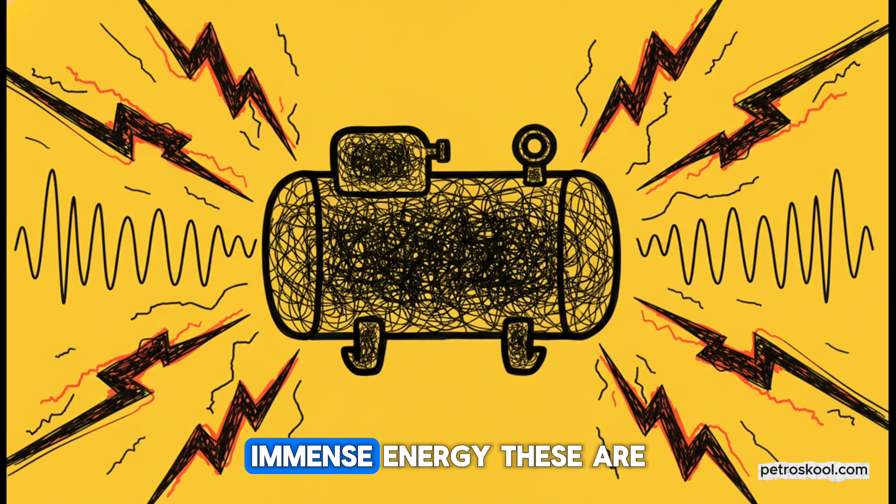The whole story of a compressor really boils down to just one thing: immense energy. These are not your average pumps. They are high stakes, high energy containment systems. And getting your head around that fact is the absolute first step to working with them safely.

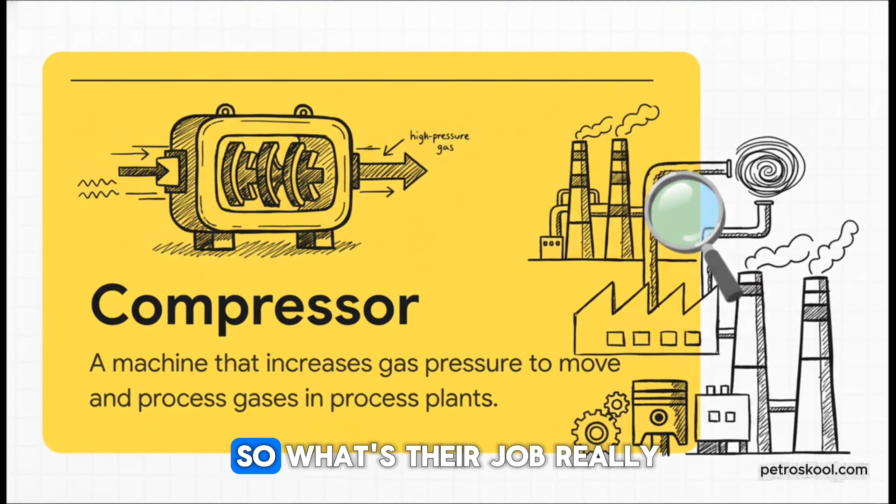So, what's their job really? Well, in a nutshell, a compressor takes a gas, squeezes the heck out of it into a smaller space to ramp up its pressure, and then uses that super energized state to power all kinds of industrial processes. Seriously, it's the engine behind so much of what we make.

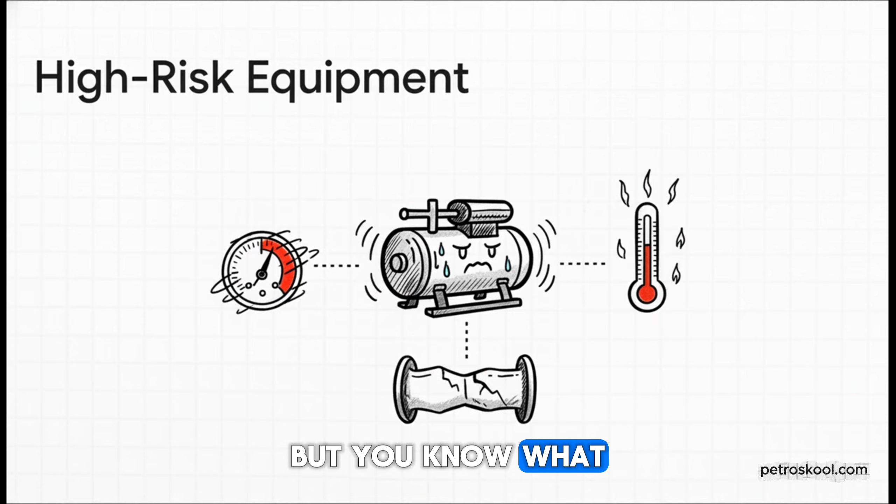But you know what they say, with great power comes great risk. We're talking about machinery that combines incredible speeds, extreme pressures, and soaring temperatures all in one place. The potential for a major incident is always there, which is why safe operation isn't just a good idea, it's absolutely non-negotiable. So here's our game plan.

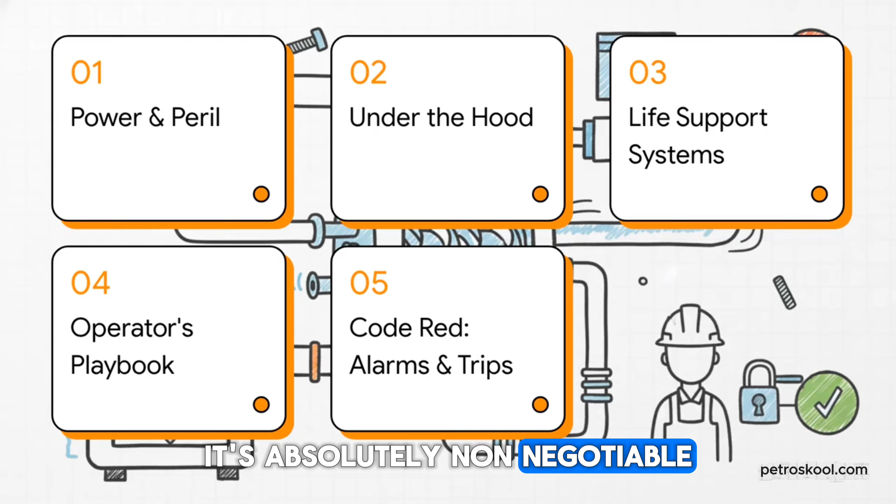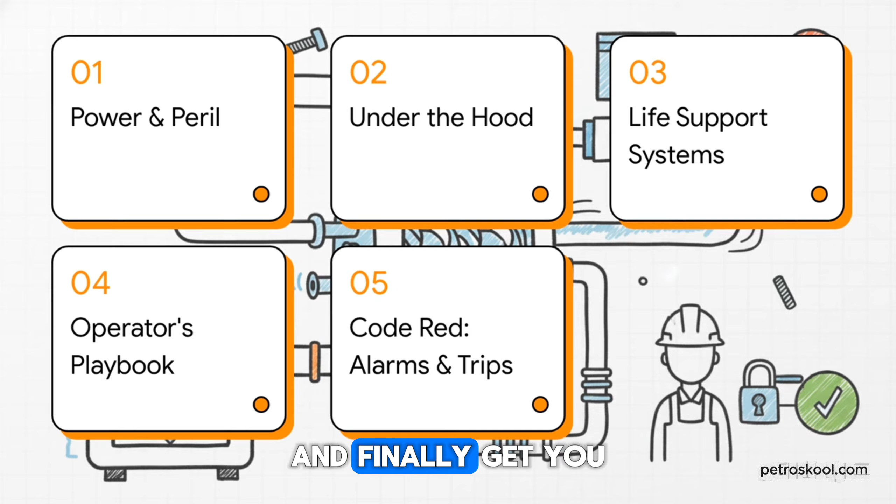We'll start with that balance of power and peril. Then we'll take a look under the hood at the different types, cover their essential life support systems, walk through the operator's playbook, and finally get you prepped for a code red situation.

Okay, so let's be real clear about this. Managing all that power and dodging the peril, it really comes down to one thing, and that's the knowledge and the vigilance of the operator. Your understanding is the number one safety system.

All right, let's pop the hood and see what we're working with. Because not all compressors are built the same. They're highly specialized tools, and the right one is always picked for a very specific job, depending on what the process needs. At the top level, they basically fall into two big families.

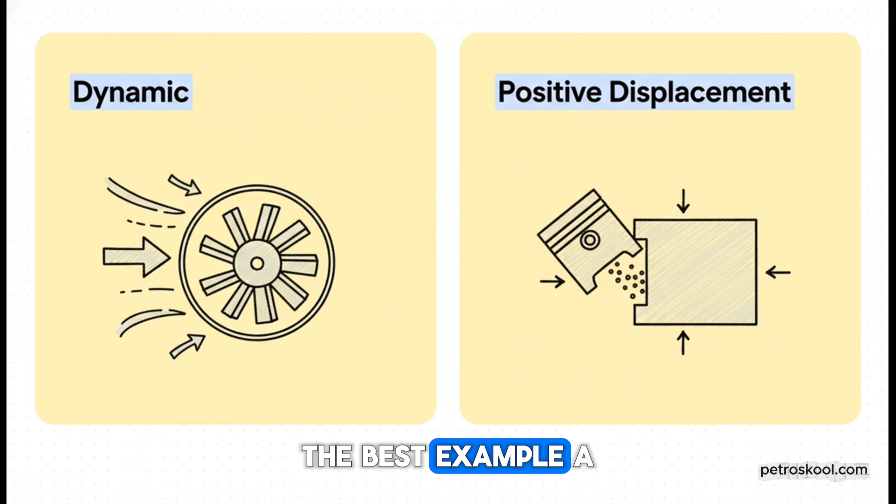On one side, you've got your dynamic compressors. Think of a centrifugal type. These things use pure speed, spinning these parts called impellers to literally sling gas outwards and build up pressure. Then, on the other side, you have positive displacement compressors, which physically trap a chunk of gas and then squeeze it. The best example? A piston moving inside a cylinder.

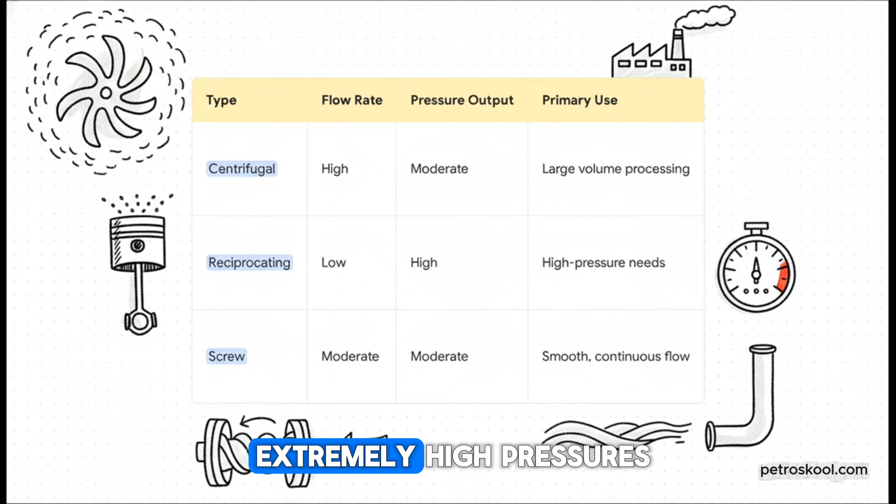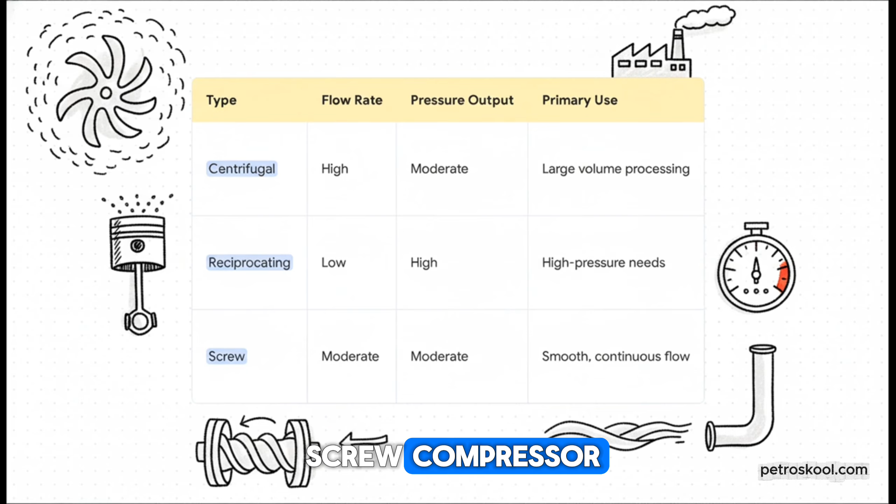Now, this is where it gets really interesting, because this chart tells you the why behind each type. If you need to move a massive amount of gas, but the pressure doesn't need to be crazy high, the centrifugal compressor is your workhorse. But what if you need to hit some extremely high pressures? Even if you're not moving a ton of gas, well, that's a job for a reciprocating compressor. And for those times you need a nice, smooth, continuous flow, you'd go with a screw compressor. See? The process always picks the machine.

But here's the thing, it doesn't matter what kind of compressor you have, none of them can do their job alone. A compressor might be the star of the show, but it's not a solo act. It relies on a whole network of other systems to keep it running safely. Just think of them as the machine's own dedicated life support team. And these are the big ones, the absolute non-negotiables.

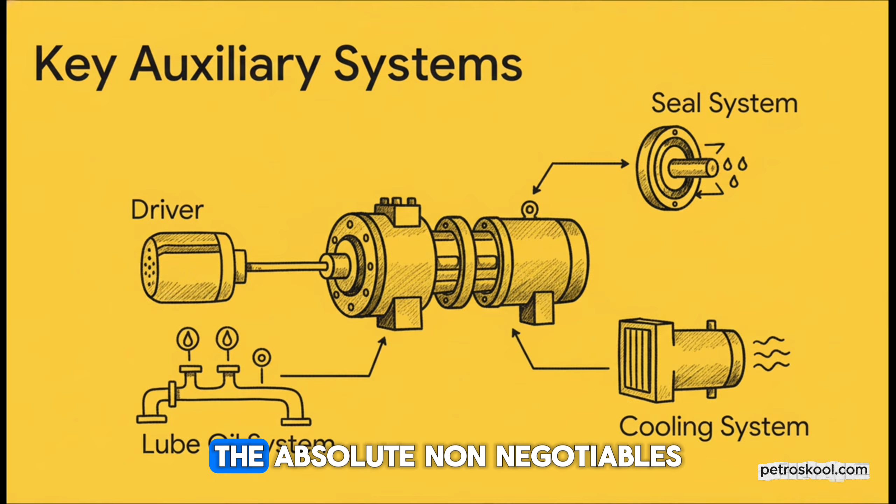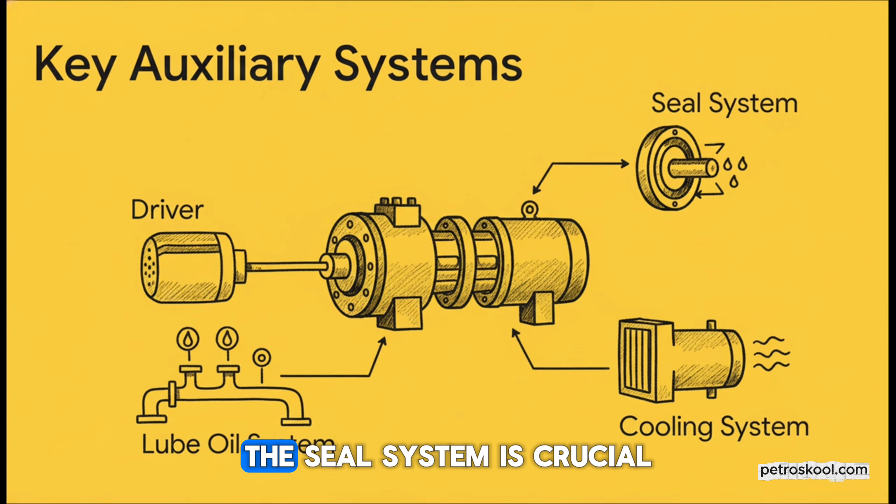You've got the driver, that's the muscle, usually a big electric motor or turbine. The lube oil system is the literal lifeblood, keeping all the moving parts from grinding themselves to dust. The seal system is crucial. It keeps that high-pressure gas from escaping. And of course, the cooling system, which has the massive job of managing all the heat. If just one of these fails, the whole operation is at risk.

For all the complex systems working to keep it safe from the outside, the single greatest danger to a dynamic compressor actually comes from within.

So what do you think it is? What is its greatest enemy? The answer is a condition called surge. And trust me, it is every bit as terrifying as it sounds. It's this incredibly violent event where the gas flow inside the machine actually reverses on itself for a split second. This causes these massive vibrations and pressure waves that can literally tear the machine apart from the inside out.

And that is why the anti-surge system is one of the most critical pieces of safety equipment you'll find on a centrifugal compressor. Which brings us to the most important piece of the whole puzzle: you. The operator's every move is guided by a strict set of procedures. A playbook, really, that's designed to guarantee safety from the second that machine starts to the moment it stops.

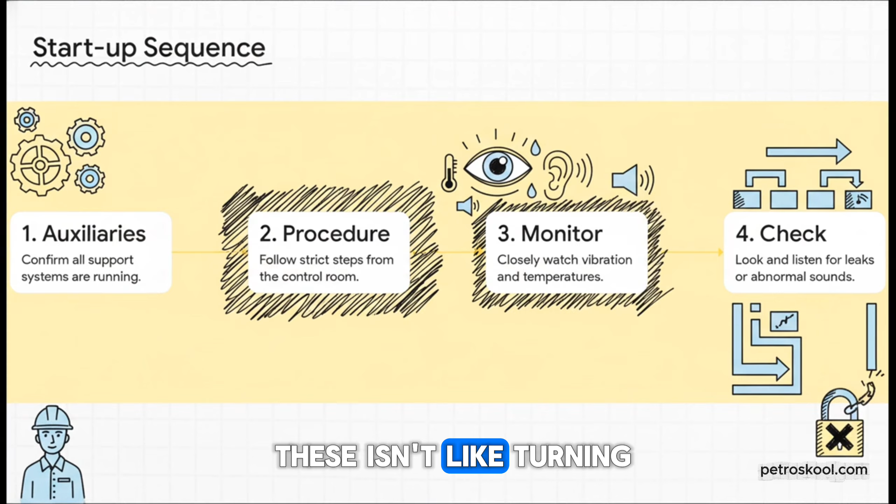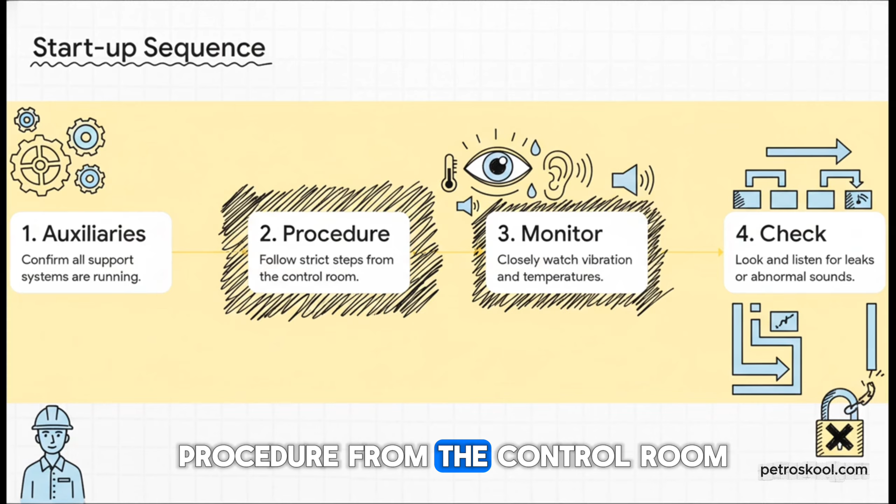Yeah, starting one of these isn't like turning the key in your car. It's a precise, careful sequence. First, you have to confirm that all of its life support systems are up and running. Then, you follow a strict step-by-step procedure from the control room, while the operators in the field are your eyes and ears on the ground, listening and watching for any tiny sign of trouble. The source material is clear on this. Skipping steps leads to failure.

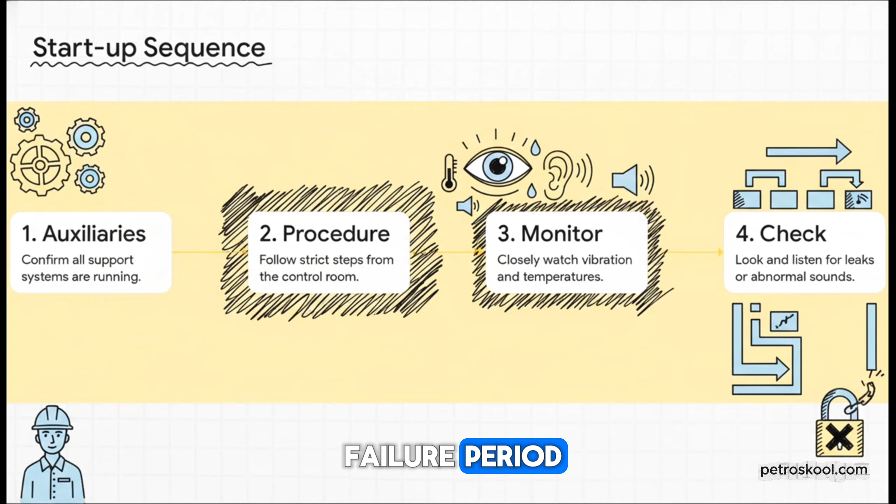Period. So once it's up and humming along, your job becomes all about vigilance. You are the guardian of what's called the safe operating envelope. That means you're constantly watching the key numbers: flow, pressure, temperature. You're looking at trends, trying to spot subtle changes that could be an early warning, and you report anything that looks or sounds out of the ordinary right away. Pushing a machine past its design limits is just never, ever an option.

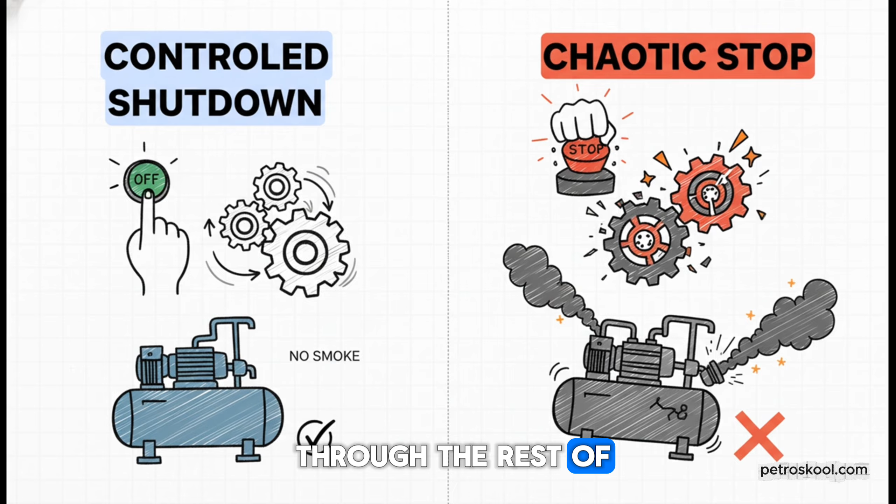And don't forget, bringing the machine down for a stop needs just as much care and attention as starting it up. A messy, chaotic shutdown can cause serious damage and send shockwaves through the rest of the plant. A planned, controlled shutdown is always the goal. But what happens when things start to go sideways, even when you're doing everything right? Well, that's when we enter code red territory. And understanding alarms and trips is absolutely critical.

This chart tells a really clear story about what you should be watching for. High vibration is the #1 red flag, a whopping 40% of the time. Right behind that is high temperature, and then problems with lube oil pressure. You add those three up, and that's 90% of the common alarms you're ever going to see.

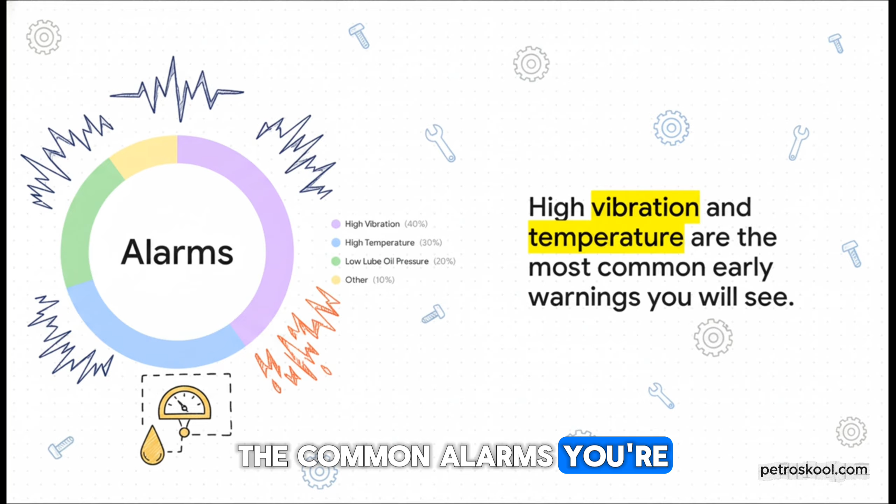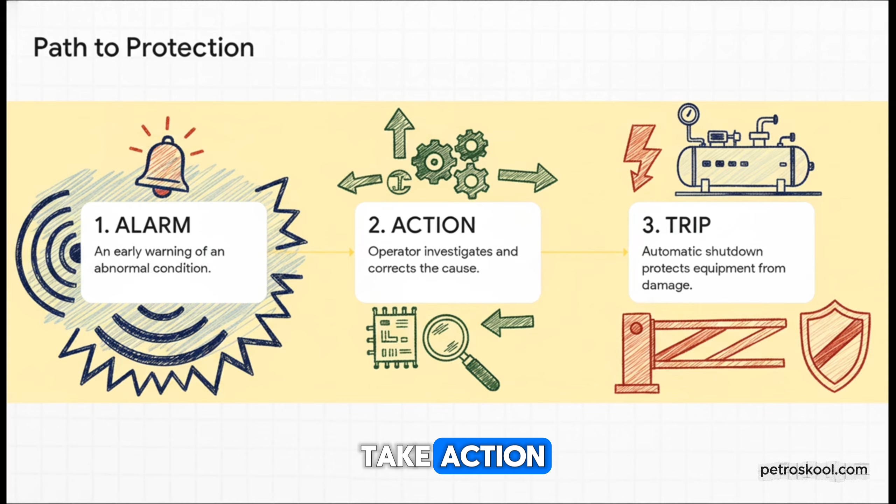Now, the whole protection system is designed in layers. First comes the alarm. Think of that as a tap on the shoulder, an early warning telling you to pay attention. That's your cue to take action, investigate what's going on, and fix it. But if the situation doesn't get better and actually gets worse, the system itself steps in with a trip. That's an automatic shutdown, and its only job is to save the machine from destroying itself.

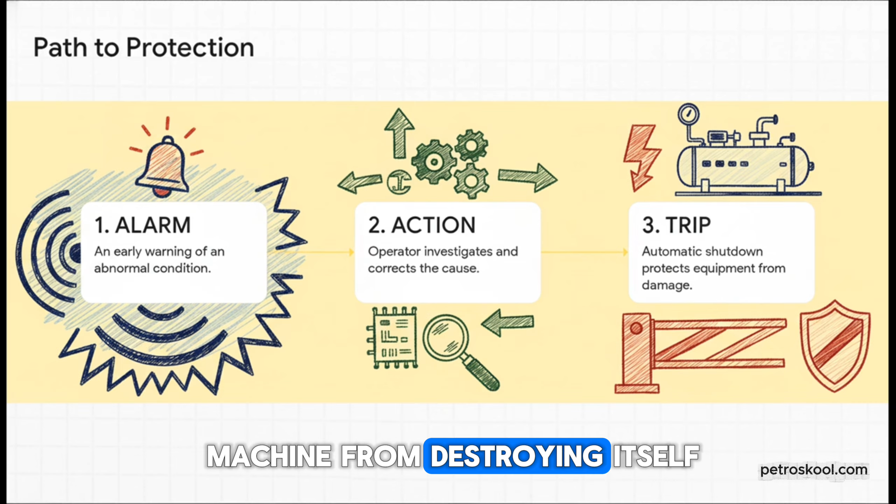And this right here, this is the golden rule. A trip is not some annoying obstacle getting in your way. It is a safety device doing its job. It is the last line of automated defense for that machine. Bypassing a trip is like disabling the airbags in your car right before you get into an accident. You just don't do it.

Ever. So when you think about it, after all the incredible engineering, all the automated systems, all the procedures, when a real crisis is unfolding, what is the true final line of defense? It's you, the trained, the knowledgeable, and the responsible operator. An automated system can protect the machine, sure, but a calm, well-trained operator protects everything. Because at the end of the day, no matter what the pressure is to keep things running, safety always, always comes first.